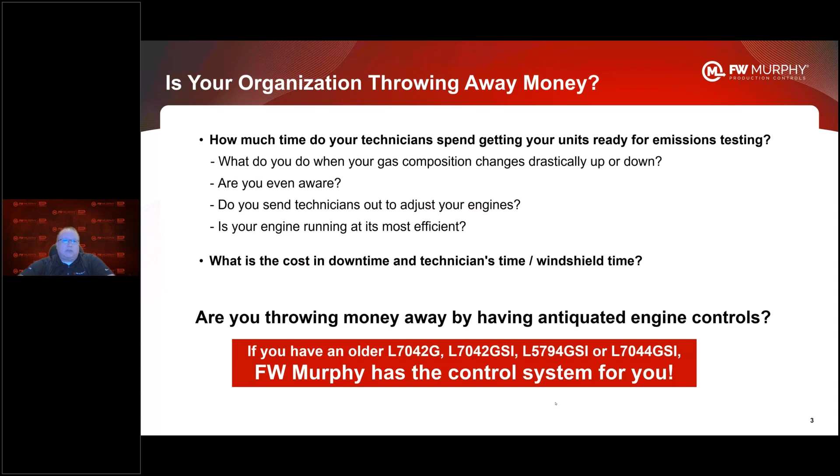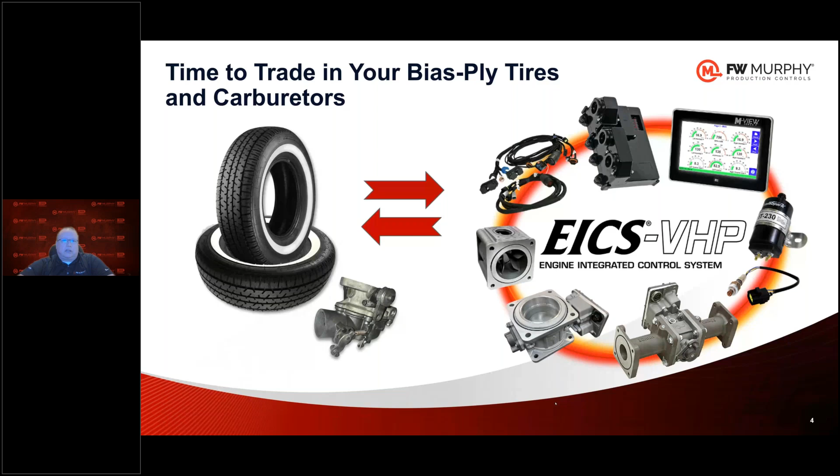But otherwise, it's all fuel injection and state of the art radial tire technology, right? So is it time, in the natural gas industry, to make that leap to the next evolution of the control system for these engines?

And ultimately, that's what happened. There was an outcry from the marketplace that, hey, this is the better system. And if you want us to continue purchasing and using your engines in the compression field, this is what we want to be using. Ultimately, that twisted the arm of a very powerful OEM to make that happen. And so, from the beginning, the EICS system has been very well received.

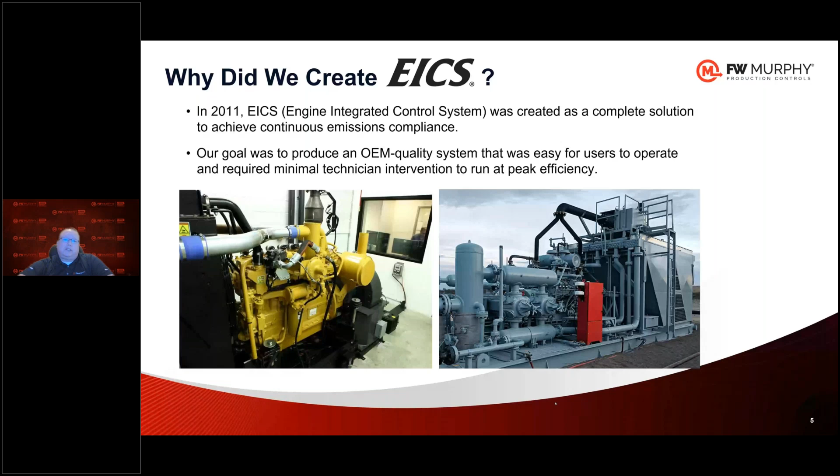Initially on the smaller engines, we approached things a little bit differently than the way we're doing them today on the bigger engines. So initially, we would have done that with a direct-acting electric pressure regulator. We would have eliminated the older style regulator and added a very quick-acting electric regulator, and then added an electronically controlled throttle onto the system.

We also included what I would call a unitized catalyst system. It was a sealed system. It included a full sensor package, so oxygen sensor, temperature sensors, so that you understood the health and whether your catalyst was operating at peak efficiency. And ultimately, the way it was serviced, you would pull the whole unit out and just replace the whole unit as a complete package.

From the beginning, we were offering this as a complete standalone kit. So you get an ECU, you get an HMI to look into the operating parameters and health of the engine. You get all the brackets you need, all the hardware you need, the harnessing you need, all included.

In addition to that, we were including our smart coil technology on the engines, which gives us the ability to monitor live the kilovolt output across the ignition system, the coil, the secondary, the spark plug, so that in live time on the screen you can monitor the health of your ignition system. All with the goal of being able to more accurately predict when you have maintenance due on the units, versus just doing it on a time-based schedule.

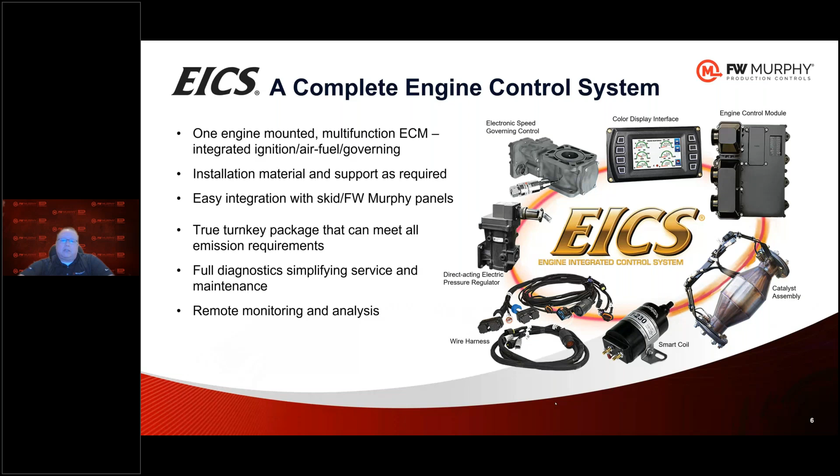So what we realized is as we got into larger and larger engines that ultimately these smaller pieces that we had created for the small engines were not going to be sufficient. So we were going from sub 200 horsepower engines in some cases all the way up to 1700 horsepower. And initially some of the solutions were just like daisy chaining or running in parallel some of those smaller solutions,

And so what that gives us is two valves, multiple sizes, where we can control very precisely the flow of air and the flow of gas, or air and gas in some cases, across the engine. And so you may think, well, this is just a fancy electronic butterfly. Kind of true, I guess, but it's really much more than that.

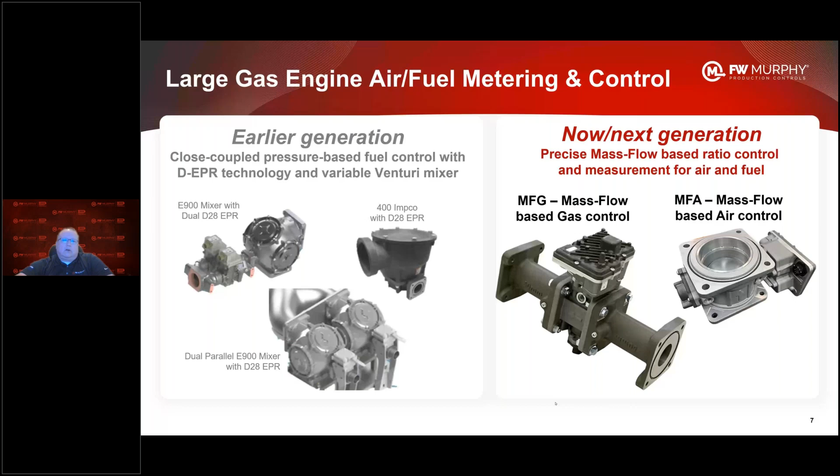And so beyond just being a control device that is monitoring or controlling the flow of air and gas into the engine, what you get is a very robust system that has many items housed inside of it, not only for the purpose of controlling those air and gas streams, but also monitoring and measuring the flow of air and gas across those units.

And so, like I mentioned, we've got some different sizes. Today, the VHPs, the 12 cylinder specifically, is using a 50 millimeter gas valve with a 105 millimeter air valve. It uses a set of those per side. So there's two MFGs and two MFAs per V12 engine, which gives us some really nice advantages that I'll talk about as I show you more about what's happening specifically on the engine.

But built within each of these units is an individual sensor package housed within the unit itself, right? So beyond just the control of flow, we're actually measuring the pressure coming into the valve, the pressure leaving the valve, the pressure across the butterfly, temperature of the media that's passing through the valve. All of those are being live time monitored.

And ultimately what that does for us is it allows us to measure the mass flow of the media that's passing through that valve. And we can use that information to do other things within the control system that until now really haven't been possible. And I think what you're going to see is it's pretty exciting stuff. And so, again, it's a control device, but also a measuring device at the same time.

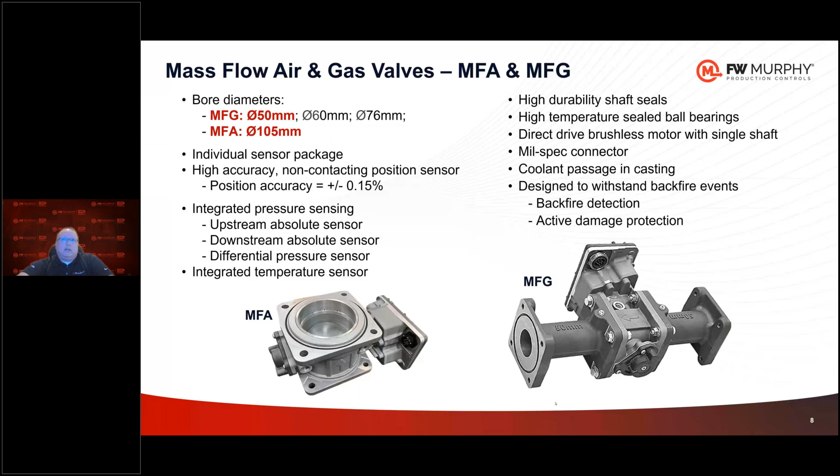In general, there's a little bit of adaptation that needs to happen from the air pipes coming from the intercoolers down to the mixer pipe here. But other than that, all these pipes are inclusive in the kit and make for an easy installation.

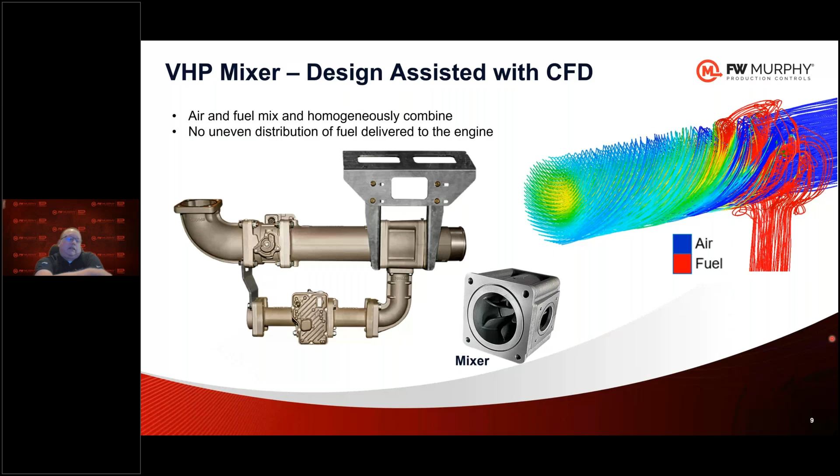So one of the things that having those valves in the system does for us is it ultimately gives us the capability to calculate the BTU of the fuel that's running in the engine and passing through the engine. And so this is really where, in my opinion, many years in this industry, this really steps up to the next level.

Today, like I mentioned, I'm starting to see more and more customers have on-site fuel analysis, but the fact that you have an engine, it needs a control system anyway, and we're going to put a control system on the engine that ultimately gives you the capability to understand what the fuel BTU level is at any given time, I think is really the next evolution of control systems in our industry.

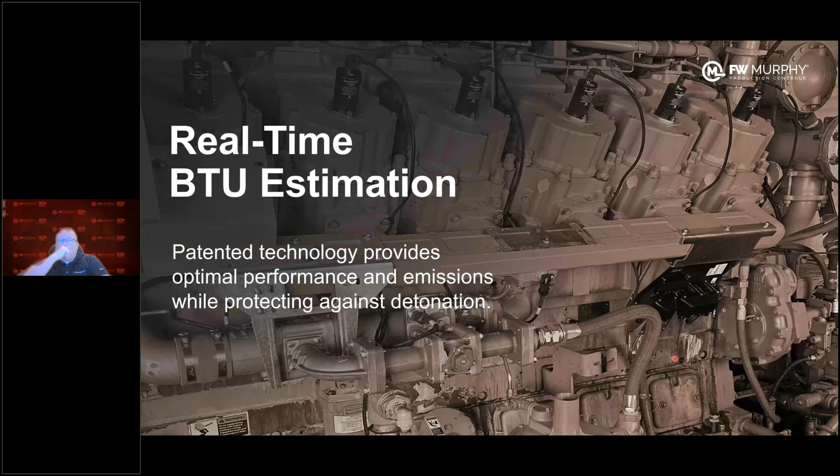So how does that work? How does real-time BTU work? Like I mentioned, the MFA and the MFG are full of sensors themselves, a complete sensor package in them. And so what ultimately happens is a combination of the readings that those valves are getting and then the outbound oxygen on the unit gives us the ability to then calculate the BTU that's passing through the engine. And so this is a patented technology with these valves.

And at this point it has been released on a number of models. So, for those of you that have VHPs that are saying, well, heck, I've been operating for a while and I've never heard of this. Ultimately, with the VHP, it wasn't released upon the release of the VHP EICS system, but it is now available.

And so if you already have EICS and you're sitting in on our presentation today and you want to consider potentially using this functionality, just reach out to the FW Murphy sales team and we can talk with you and look at your operation and see what it'll take to go ahead and turn that on.

Ultimately, it was built into all the systems. It was still going through some fine tuning initially, but as we sit here today, it's been released to the field on 3 other engine models and has been working really well. And so we're planning to be using it on the VHP. And again, if you already have VHP and this is something you think you'd be interested in, just reach out to us and we can talk about that.

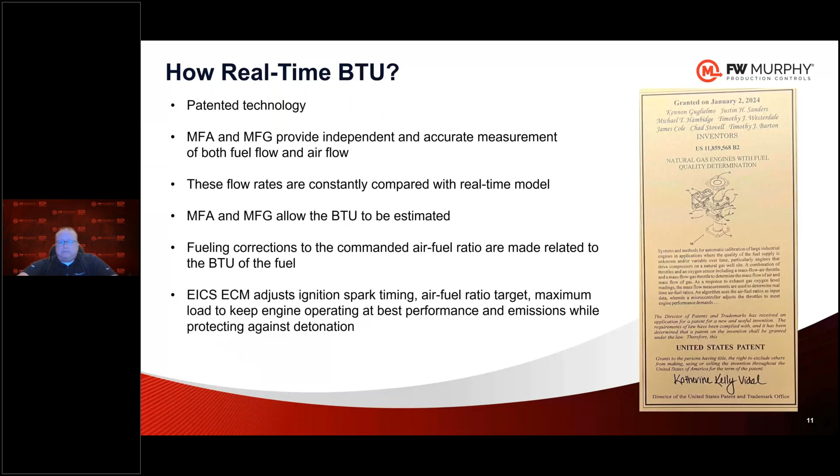And as we were developing this system, ultimately what we did was we tested from 900 all the way through propane. So that was kind of the most straightforward way for us to understand all operating parameters necessary for the engine. And so we would start at 900, we would sweep the fuel all the way to pure propane so that we understood where ignition timing, air fuel ratio, all of those things needed to be. We would have a clear understanding of that and make the mapping for the engine at every point along the way.

So basically covered this again. Why do you want it? Well, again, the engine's not going to be where it needs to be if I don't know what that is. With that typical fixed setup, I have 900 BTUs, I have a 75 WKI, I have an 80 methane number, whatever that is, it's doing the same thing, likely, maybe not in as sophisticated of a way, but it is then setting up maps which are saying, here's where ignition timing needs to be. Here's where my air fuel ratio set point needs to be, right? It's doing that. But the difference is we're doing it on the fly and then we're making changes to it if the composition of the fuel changes.

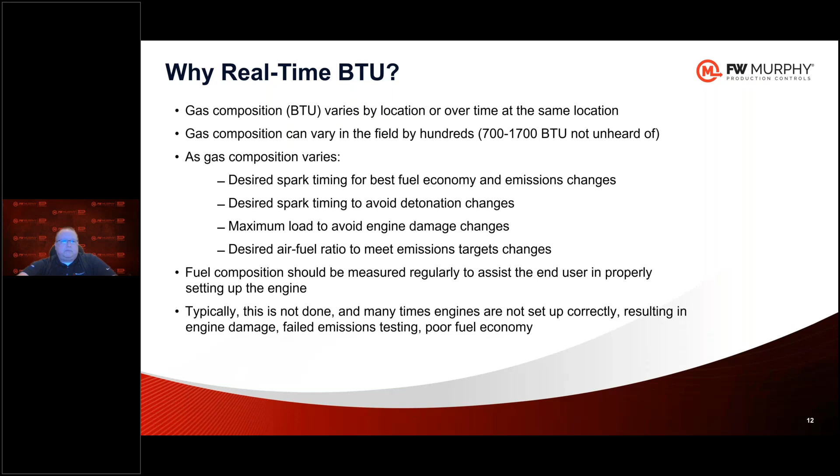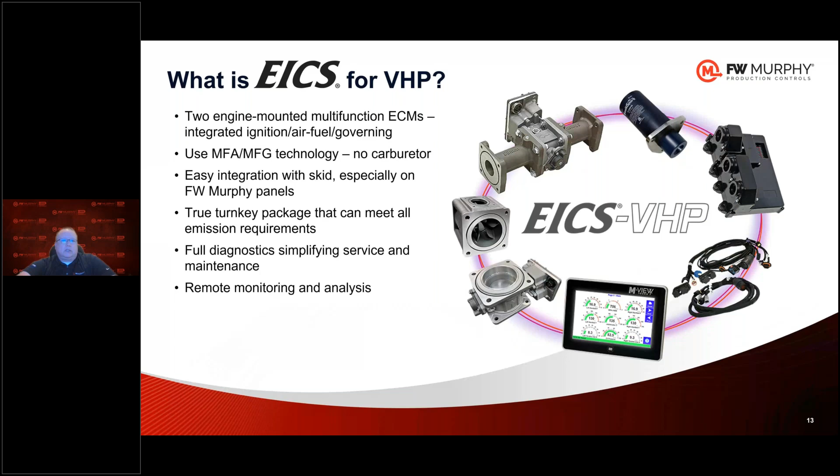So, again, what is the EICS specifically for VHP? Again, this was the early system that I showed earlier in the presentation, DPR, which was the direct acting regulator, et cetera. So this is what the VHP system itself looks like. So, like I mentioned, dual MFAs, dual MFGs, dual mixers. So each side of the engine has its own air and fuel gas train. We're actually running two ECUs. I've heard some people in the field make comments about that. I'll tell you why we're doing it.

So our ECUs actually house the ignition channels as well as the detonation sensing channels. And so while other systems may have one ECU, in general, they have multiple other boxes as well, right? And so we're basically taking those quote unquote other boxes and combining them as part of our ECU. So we run an ECU mounted to the side of the engine per side, driving those systems on each side of the engine. And then we have very fast CAN communications linking those two ECUs together and then back to the panel. So really all of our decision making and all of the controls processes within the system are happening in matters of milliseconds typically.

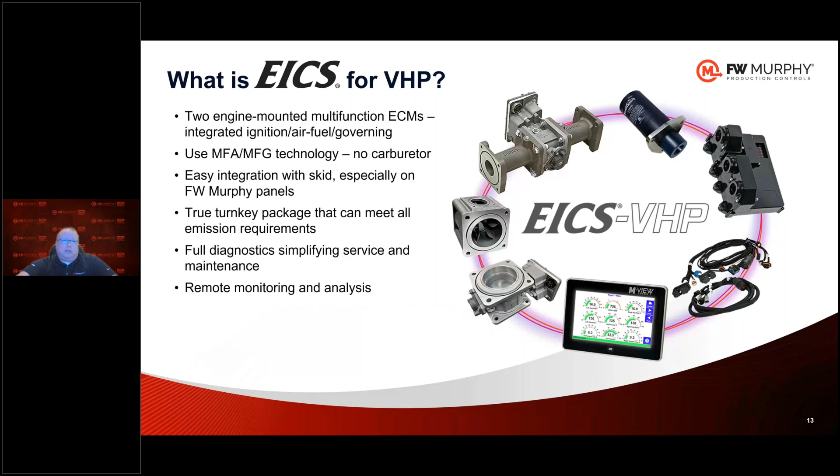So, like I mentioned earlier, the kit's going to include everything you need to easily install it on the engine. This is some of the other stuff not shown on the previous picture. Like I mentioned, brackets. We include a full sensor package in the engine, all your detonation sensors, all your manifold air pressure and temperature sensors, oil pressure, coolant temperature, oil temperature. All of those things come standard in the kit, all the piping necessary to make those adaptations of the MFA, MFG, the harnessing all comes in the kit.

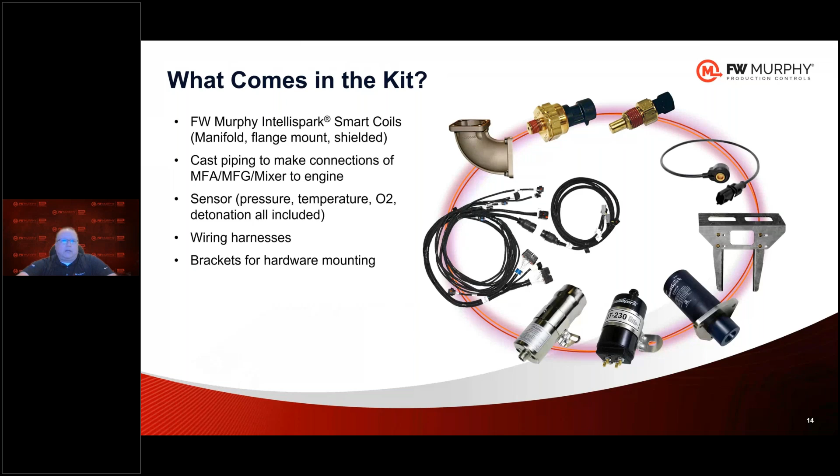We have three different styles of coils available in the kit, whether it's flange mounted for your 7044, 5794, it's manifold mounted for your 7042s and older engines, or we have also a shielded coil available. So that's all standard in the kit that you purchase. And in many cases, like with the coils, it's going to be engine specific. So we'll have a main base kit, which is all the common components, and then we'll have sub kits, which are a 7042 kit or a 7044 kit, and that will differentiate things like flange mounted coils versus manifold mounted coils. We do have a handful of options that are available with the kit.

I guess maybe I got corrected the other day on this. So we have a product that we'll talk a little bit more about as I continue on the presentation, which is our M-Link gateway. So we have the ability to remote monitor and troubleshoot these engines, and have a robust troubleshooting tool as part of that package. So we're actually including, so not optional, including the M-Link as part of our kit,

as well as a year's worth of connectivity. And that's maybe more than giving you remote access, it gives us access so that we can help ensure that, once the EICS is installed, it's up and running, it's running well, and if there's any troubleshooting guidance or help needed, that we can get quick access to the engine to help you ensure that everything's running smoothly.

We have a separate what we call a mini panel. So if you have an established panel, you're not going to make any panel changes on the unit. We can add this panel to the side of your existing panel. It gives you start stop, emergency shutdown capabilities, as well as houses the wiring coming off the engine and the HMI specifically for the engine.

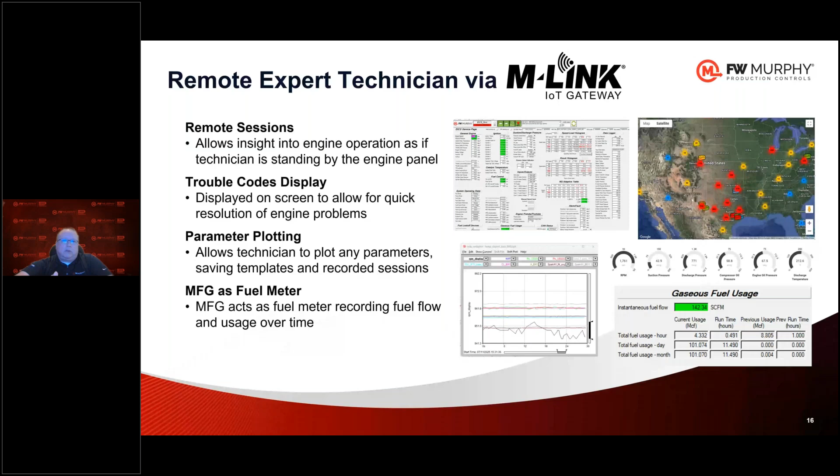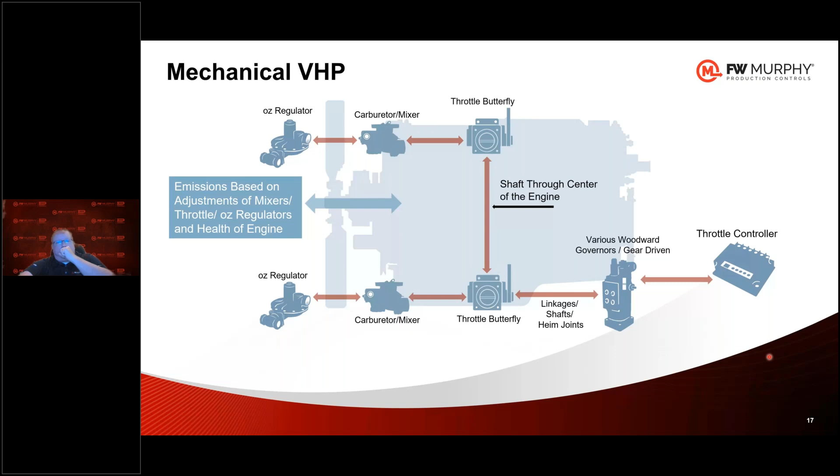So we went from that mechanical system, and then from there converted into an earlier system that I'm not going to talk about. Ultimately, a lot of these customers, a lot of you today probably still have ESM1 and you're trying to decide what to do with that. So our electronic governor controller shifted to an ECU. We've now eliminated the gear driven governor in favor of an electronic throttle actuator.

But ultimately, we're still driving those 1967 throttle butterflies with all the linkages and all the shafts. And then on the back end over here, we've added a stepper motor to our ounce regulators. For those of you that are on the line, if you've ever had to replace one of these or replace a main engine harness, one of these throttle actuators, these pieces are expensive. At this point, many of the components of this system are becoming end of life.

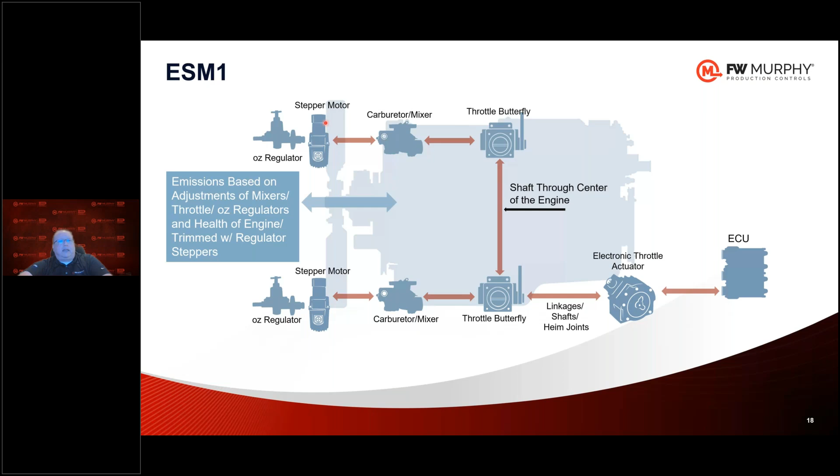And then ultimately on this system, emissions are based on oxygen coming out of the turbocharger, so pre-catalyst. But really all that's doing is sending a signal to these stepper motors to make small changes to the gas between the regulator and the mixer. And so very slow acting, not a lot of range built into it, and ultimately pretty limited on what it can do. And compare that today with where we're at.

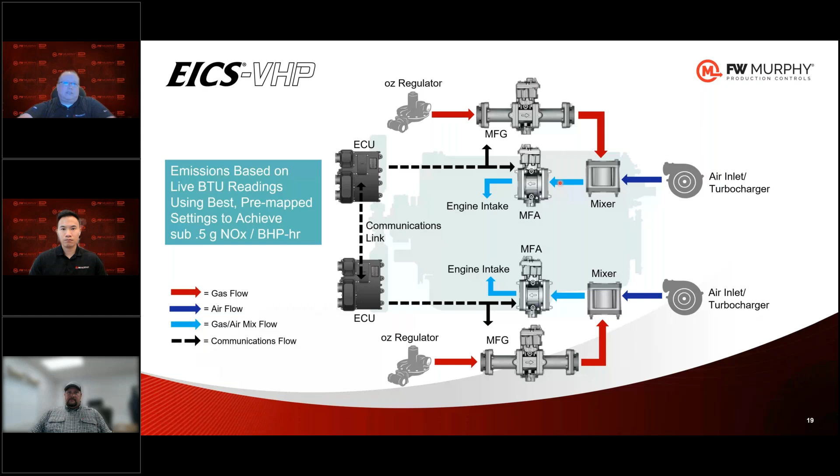Awesome. Thank you so much, Jeff, for the fantastic technical deep dive on the EICS VHP system. Now let's shake things up a little bit. I'm excited to bring Colt back into the conversation to share about what it's really like to work with the EICS system. Colt, can you hear me? Yes, I can hear you just fine. Great. Let's jump right in.

So, Colt, let's start from the beginning. What was the main problem or need that led you and Summit Midstream to take a look at a new engine control solution?

So our main issue we were facing is just keeping our engines running in compliance with the emissions regulations. Here in Colorado, they're ever changing. The demands are 24/7. We'd spend a day or two setting them where they're supposed to be, and they would stay there for a while, but then like everything else, it changes. Where we have this EICS system, you set it, you can walk away, it's gonna be the same thing. It always is.

Perfect. And I'm sure emissions compliance is a focus for a lot of our audience today as well. So when you look at solving the problem itself, what were the choices that you had, or what were you looking at in terms of the selection process? What other options did you have during that time?

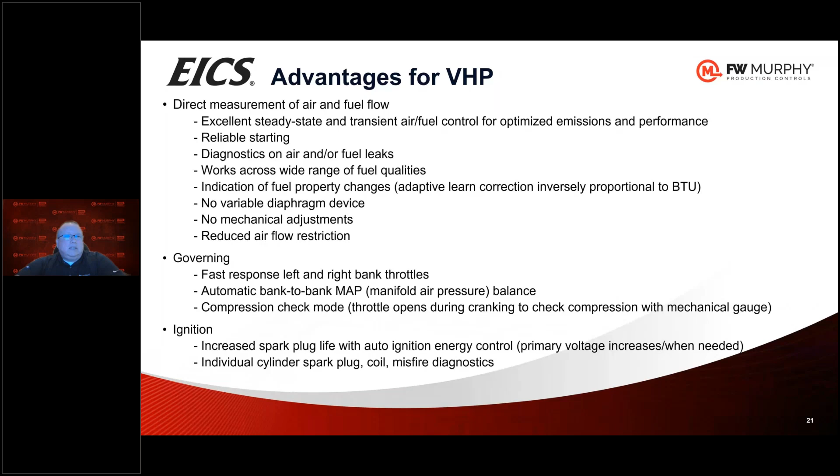So in summary, let's give your old VHP some new life, especially if you've got a 42G you want to keep running, or a 42 GSI that you don't want to make big changes to but could benefit from more reliable emissions and some additional safeties. Let's get rid of your actuators, carburetors, and linkages, and rest easy knowing your engine will adapt to a broad range of fuel compositions. Your engine will be safe, it'll run efficiently, and exhaust emissions will be in compliance.